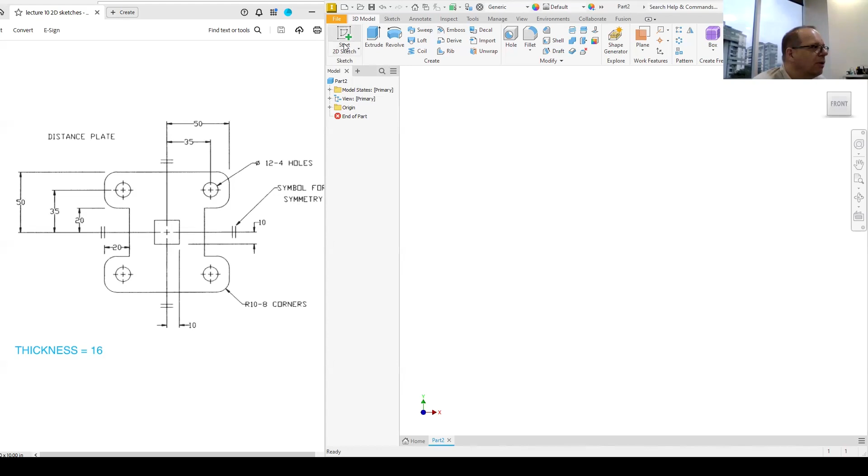So let's get started. I already have a part open for millimeters. We'll go to start the sketch, and then we will start right there.

Let's see, how far out does this go? Considering this is all the same, this must be - oh, it says right there, 20. There we go, so start.

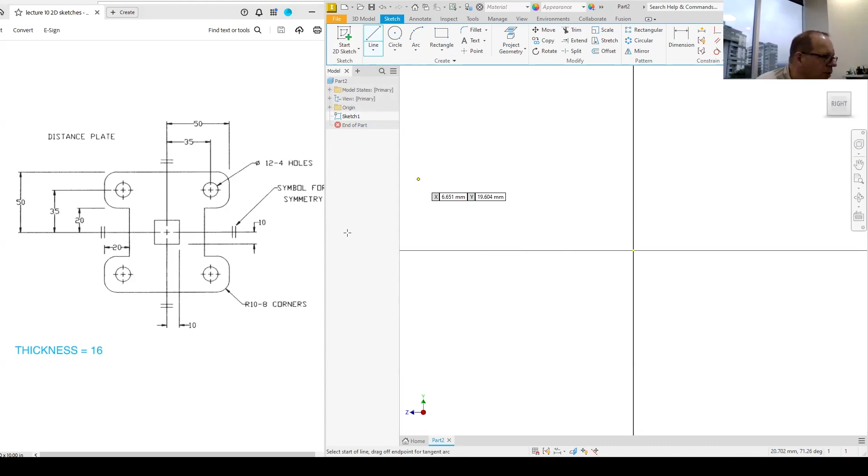I don't know, but the whole thing is how long? The whole thing is 50. So from here to there should be 30. Let's see, there - again we punch in the number 30 for the length.

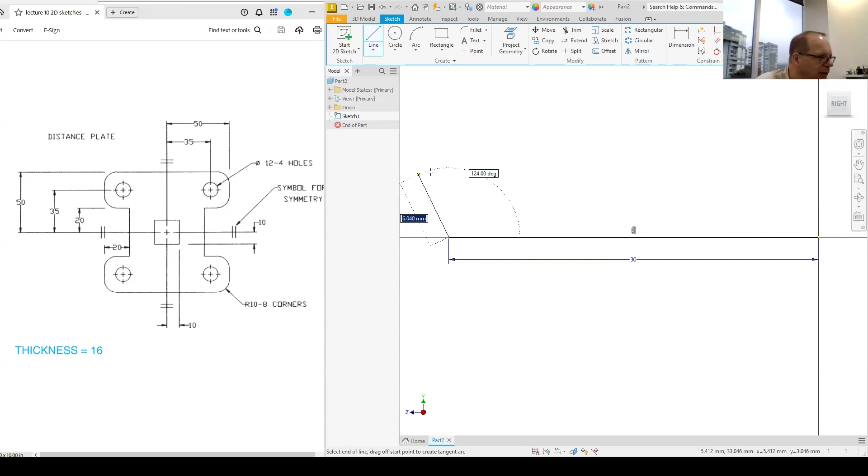We'll click on our box here, our cube, to get the right zoom. And then so we'd be here, so we go up 20. Then we want to say where it says 90 degrees, and then we can push in 20.

Again we'll do the zoom. That means we're here, and so let's just go straight all the way out. That should be another 20, because we already did 30 down there, and it's a 50 overall.

So now we're here. Difference from there to there is 30, right? Because from here to there was 20, and all the way up is 50.

30 right there, again the zoom. And then we can go all the way back here - 50, just as we expect it to be.

And then, for some reason, it didn't like that. Let's try this again. 50 - doesn't like that for some reason. See if we can convince it to come from here.

50, and we'll close it off. 50. There we go. All right, so now we have this general setup.

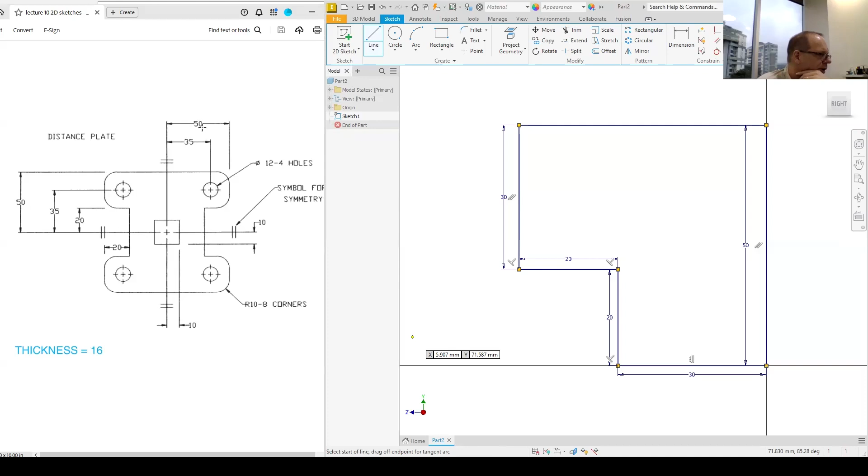Now the holes are 35 and 35, so let's do a circle somewhere around here. The diameter is 12, it says right there, right - 4 holes of 12, 12.

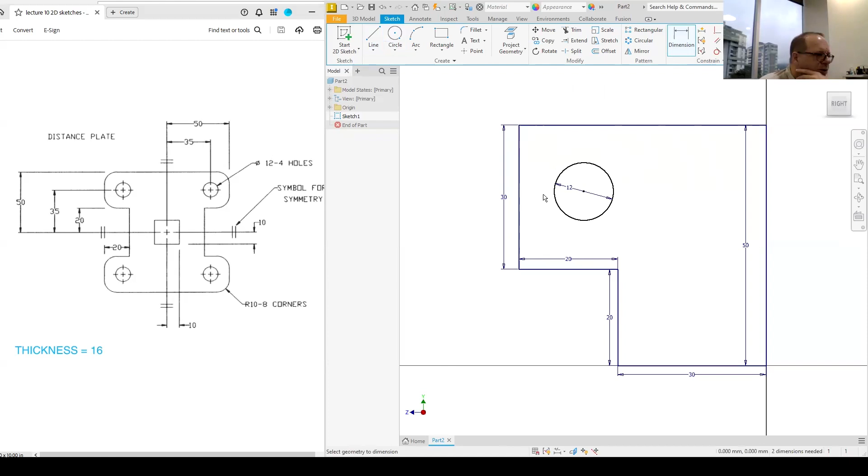And then we'll dimension it - so it says 35 back in that direction from the center of the circle, 35, and the same in this direction. Both of them were relatively close.

Looks about right. So then what else is left? We'll put that in the middle afterwards. We need to round off the corners, and they're all R10s.

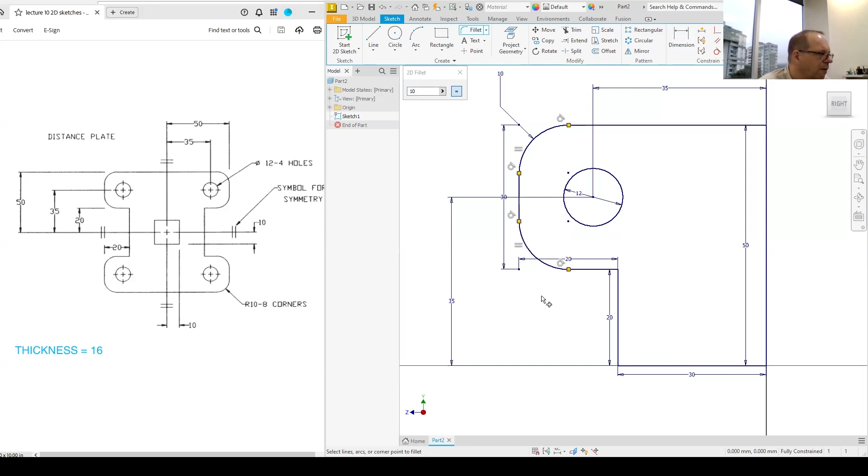Very good, so we'll go to fillet, do 10 millimeters, and then there and there. All right, that looks good. Zoom out a little bit.

And over here, done with the fillet. So I think this all looks good. So then let's do some mirroring here - see how we can get this going. So click on mirror, of course first we have to choose what to mirror.

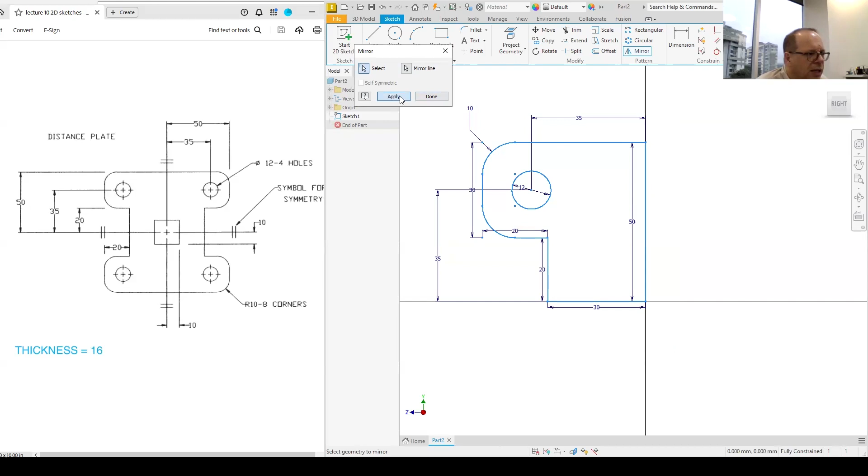So we can just drag across everything here, and then the mirror line would be right there. And then it's apply - looks about right. Say done.

Looks good, and then we'll do the same thing again - mirrored across the bottom. Choose all of this. Mirror line - either of those will work. And there we go, done.

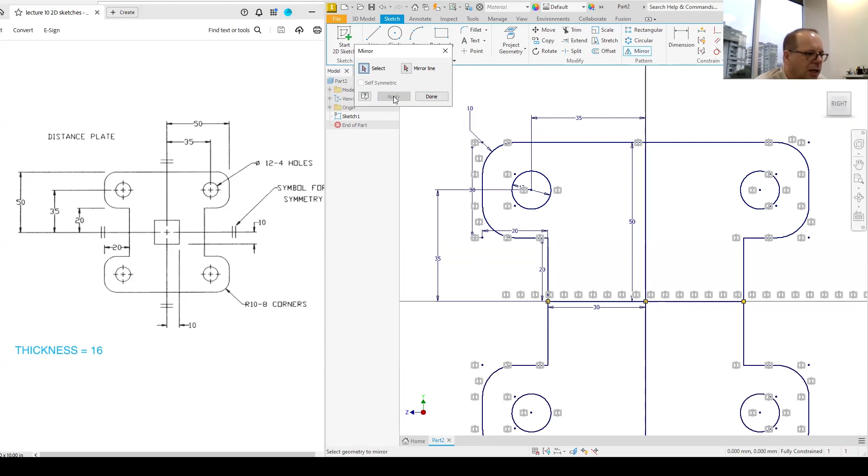Now we need to get rid of some lines, right? We need to get rid of all these internal ones, don't need those. Sometimes they're a little hard to see when they're on the axis here. So that was all good.

So what we're missing then is kind of this hole here, there. It is 20 by 20 and centered in the middle. So let's do the 2 points and center.

Our center, and then we can either put in those and dimension, or we can just type in 20, hit the tab key, and 20, and there we go. So I think this is more or less what we were looking for.

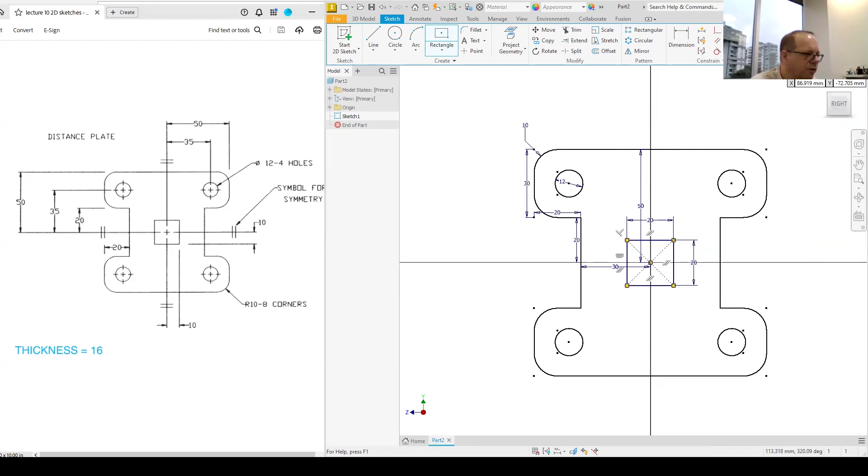So let's go up to where it says finish, and again we'll hit the little house to get the right zoom. And then what we can do, we can either go right click and get rid of the dimensions.

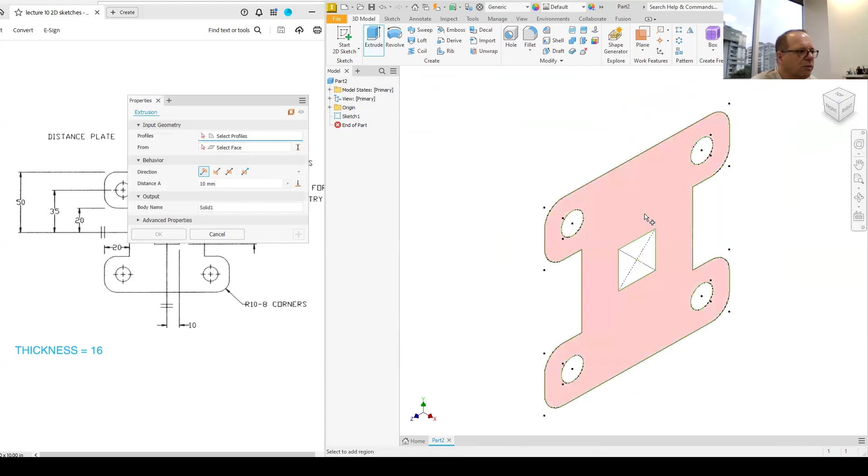Or even better, we can go and extrude it. That way we are definitely sure that we have a closed loop. And as you can see, it gives us a thickness. So let's put in the second thickness, 16 for 16.

Say OK. Let's look from the side view, and that looks pretty much the same.